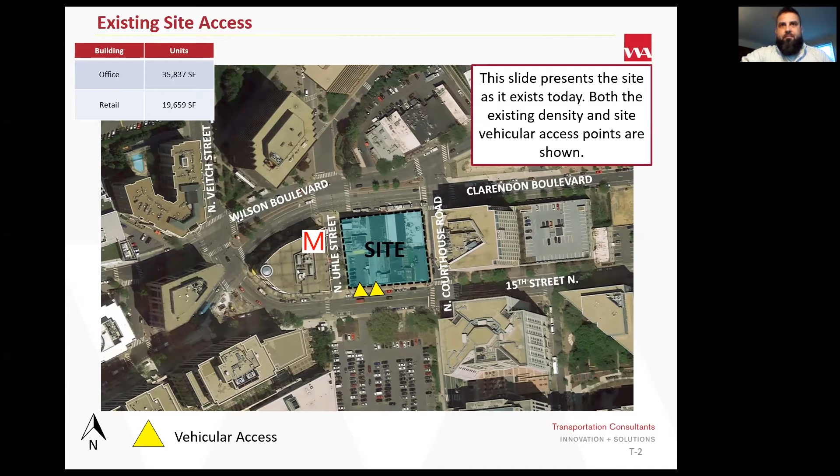The site is currently developed with 35,837 square feet of office and 19,659 square feet of retail. As proposed, the site would be redeveloped with 425 dwelling units and 17,000 square feet of retail.

The existing Uhle Street would be converted into a pedestrian promenade as envisioned in the plan. Curb extensions would be provided in the northwest quadrant, connecting the existing crosswalk to shorten the crossing distance, as well as in the northeast corner of the project at Clarendon Boulevard and Courthouse Road, and in the southeast quadrant at 15th Street and Courthouse Road.

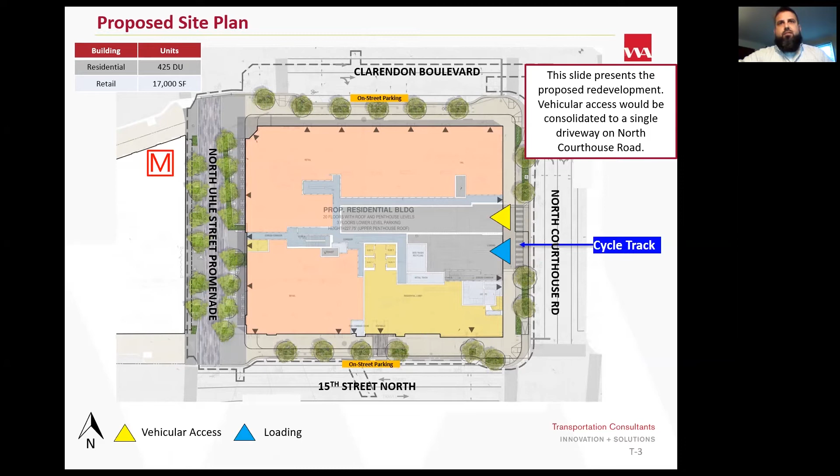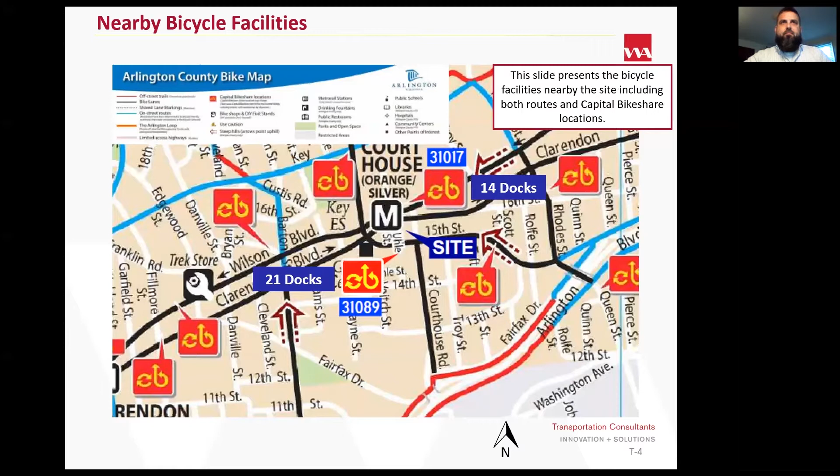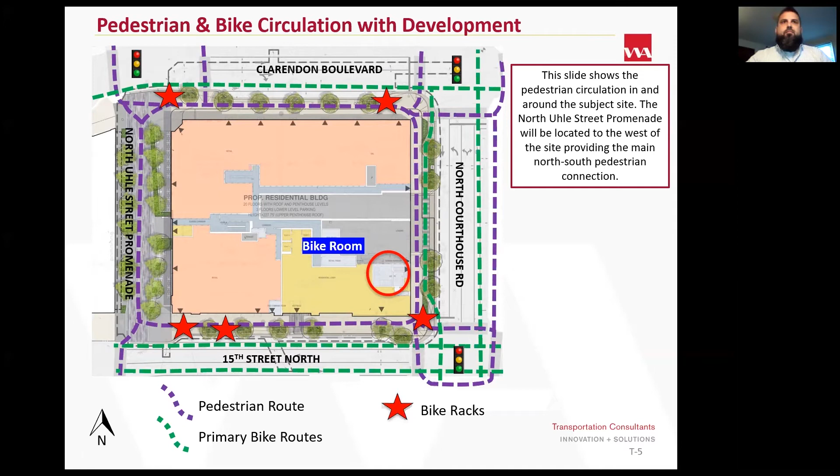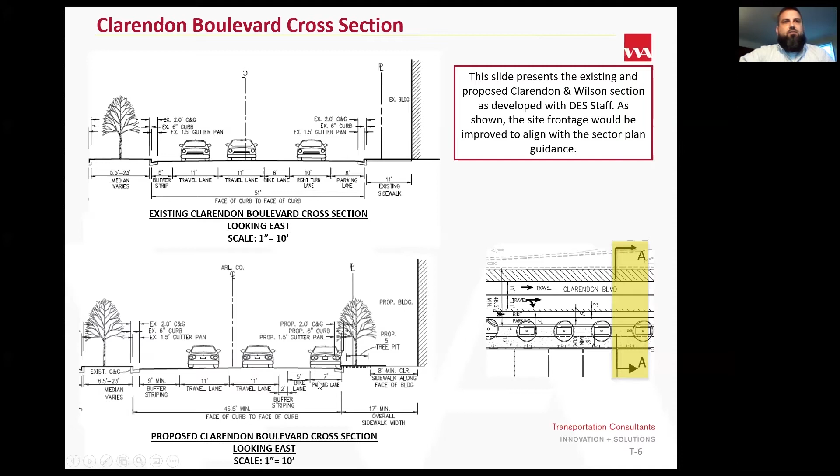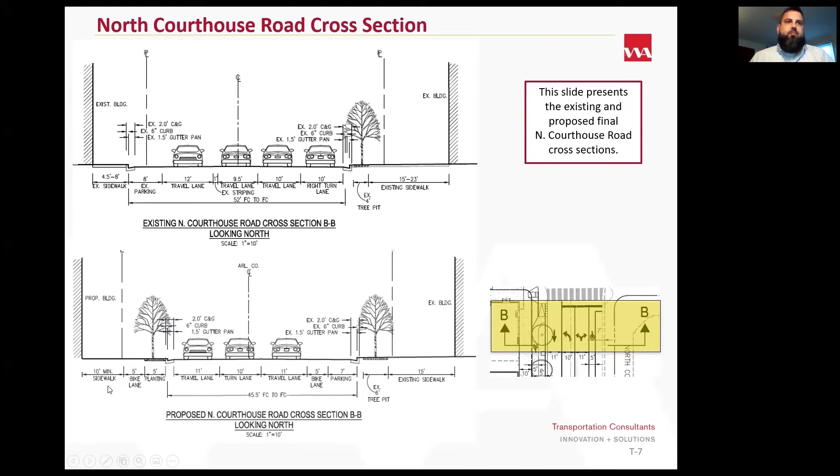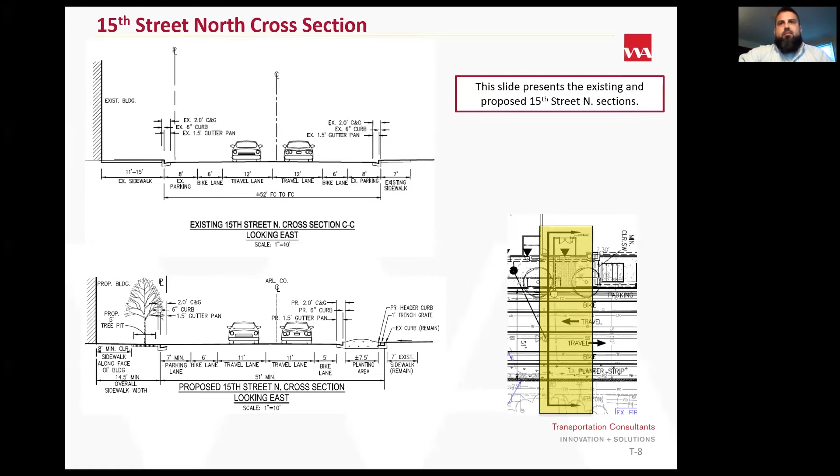This cross-section highlights the 15th Street North cross-section. Starting on the left side of the plan with the proposed building, there will be an 8-foot minimum clear sidewalk, a 5-foot tree planting strip, a parking lane, a bike lane, 1 travel lane in each direction, and a bike lane in the eastbound direction. The existing parking lane would be converted to a planting area to complement the park where the existing surface parking lot is today. Each of these sections I've outlined and summarized have been coordinated with staff and are envisioned in the plan.

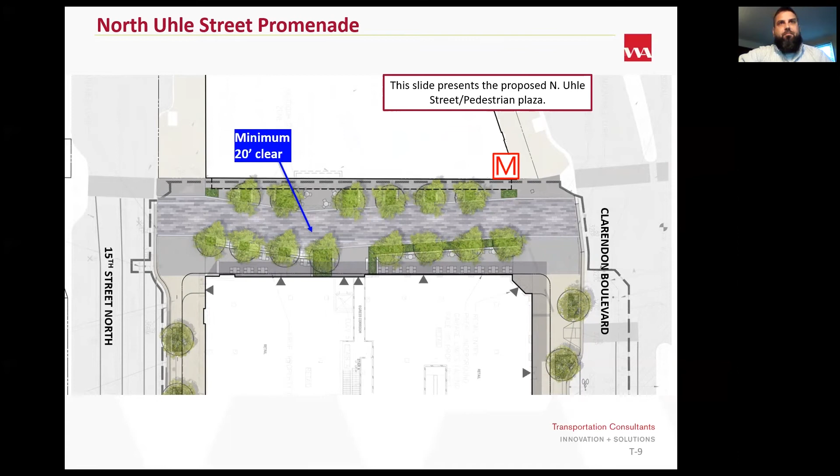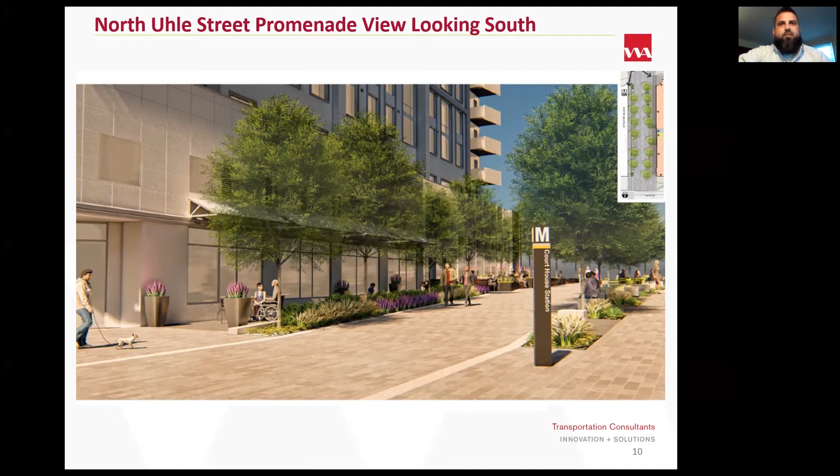This is a rendered shot if you were standing at the metro access point looking at Clarendon Boulevard, looking south towards 15th Street, with the proposed building in the background.

This slide summarizes the parking for the site, including vehicular and bicycle parking, as well as loading. The residential piece, 425 units, will be parked with 160 spaces for a 0.38 ratio. The retail will include 60 spaces for a 3.53 per thousand ratio. A minimum of 2% electric vehicle spaces with infrastructure for up to 50 spaces would be provided. A total of 426 Class 1 bicycle spaces will be included, including an at-grade bike room as well as bike rooms in the garage levels. The site will be served by 4 loading berths.

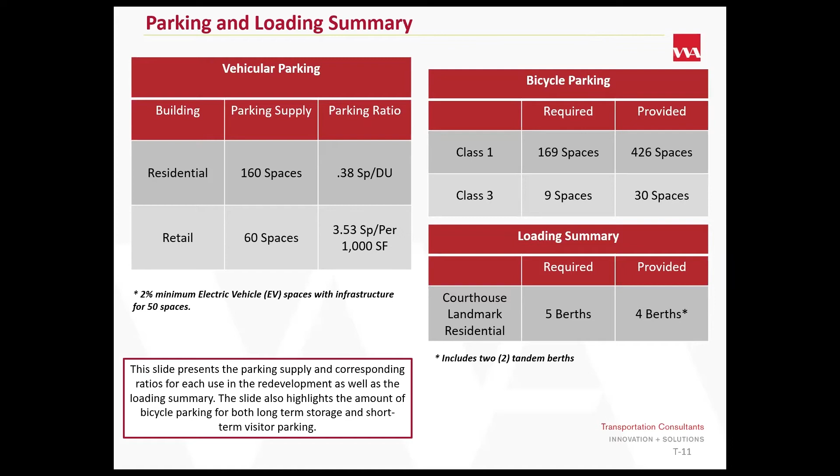This slide summarizes where those 4 loading berths are, directly south of the driveway accessing the garage. There are 2 tandem sets of bays that would allow larger vehicles to use one of the 2 bays at the same time. We are also showing an SU-30 pulling in and out of the proposed bays. A loading management plan would be provided for Arlington County approval, outlining loading and delivery procedures as well as helping manage the docks.

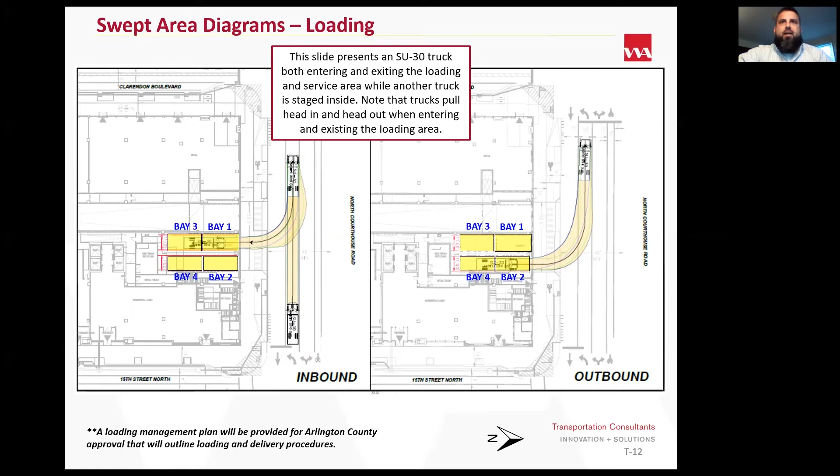Our final slide summarizes the transportation demand management plan, consistent with standard conditions for site plans, including participation and funding, facilities and improvements, car and van pool parking for residents, promotion services and policies, as well as future performance and monitoring. Thank you.

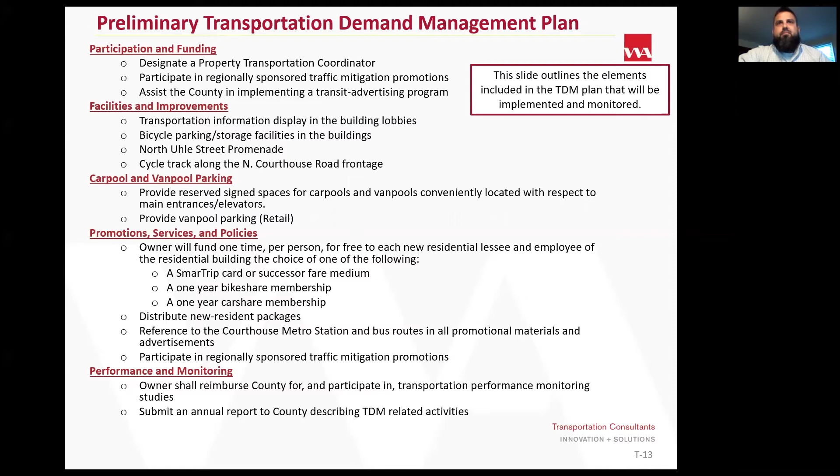Hi, I'm Jennifer Wolf with Sustainable Building Partners, and I will be presenting the sustainability portion for the 2025 15th Street North project. The project will achieve LEED Gold certification under the LEED BD&C version 4 multifamily mid-rise rating system. It will also be designed to achieve ENERGY STAR certification during operation. Energy performance is a priority, and at least 15% energy cost savings will be demonstrated. The project team continues to explore ways to increase performance, reducing on-site energy use and global greenhouse gas emissions.

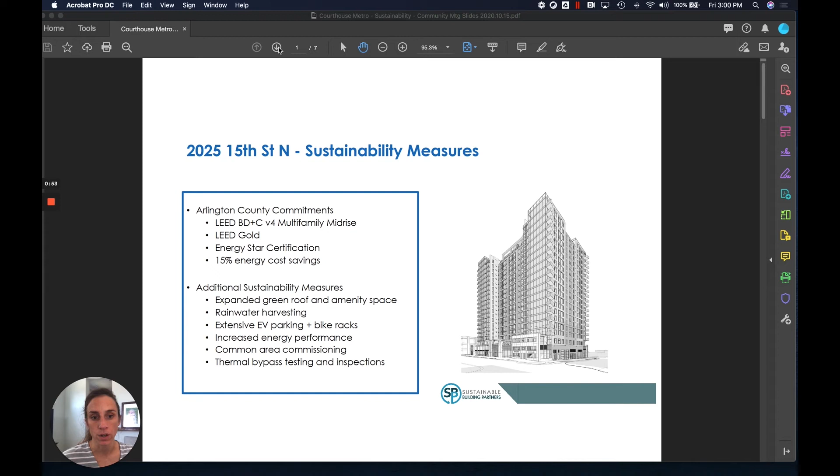Additional sustainability measures include expanded green roof and amenity space, rainwater harvesting, extensive EV parking and bike racks, and in combination with increased energy performance, common area commissioning and thermal bypass testing and inspections will occur to ensure the project is operating as intended.

This slide shows the stormwater management strategy. Low-impact development techniques, including native and adaptive plants, vegetated roof, bioretention, and rainwater harvesting, will be used. The vegetated roof and bioretention together equate to 7,300 square feet. The strategy will exceed Virginia runoff reduction requirements.

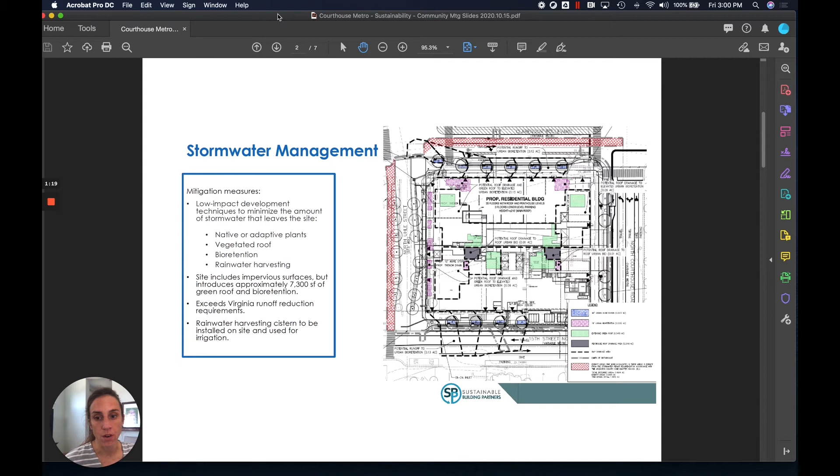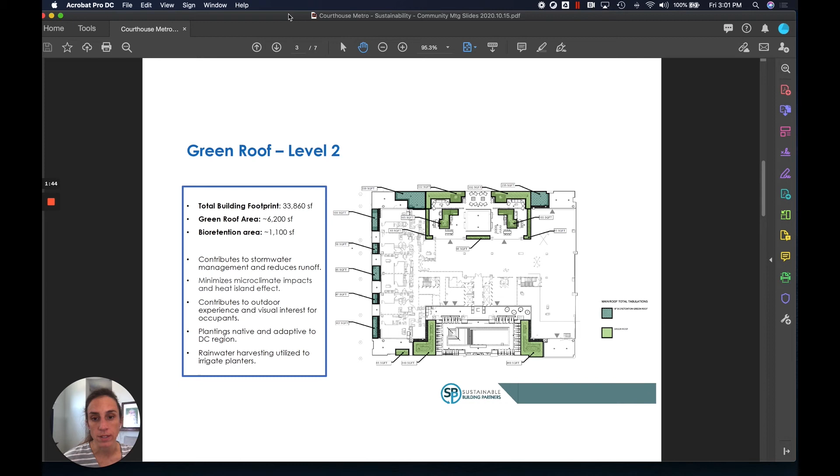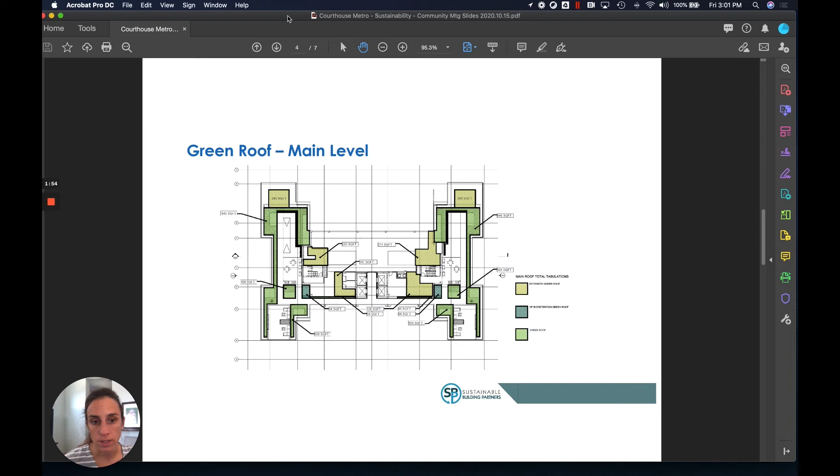The next 2 slides show the green roof locations. As mentioned, 7,300 square feet of green roof and bioretention area is provided, contributing to the stormwater management strategy. But this green roof area also reduces microclimate impacts and heat island effect, and contributes to the outdoor experience of the occupants. This image is the main roof level and shows the extensive green roof, bioretention, and green roof locations.

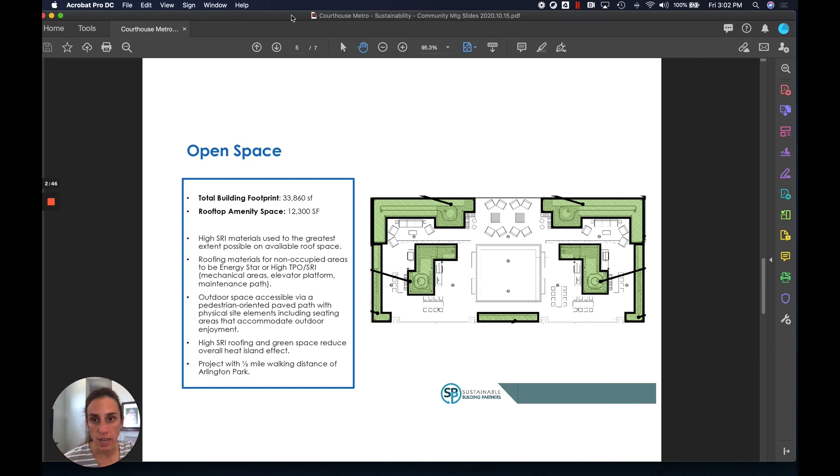Surrounding the green roof area, and as part of the roof design, is 12,300 square feet of amenity space. Physical site elements, including seating areas, will be provided throughout to accommodate occupant needs. High SRI materials for the pavers in the amenity space will be used to the greatest extent possible, but occupant experience will also be considered when making these selections. For non-occupiable areas, like the mechanical well space and stairwell roof areas, high SRI white products will be used. The project is also located within half-mile walking distance of Arlington Park, so there's plenty of open space opportunities for occupants.

The site is located within close proximity to the metro, buses, and various community resources and amenities. Currently, EV charging infrastructure is planned for 50 parking spaces to promote sustainable transportation options, which equates to 22% of the parking capacity for this site.

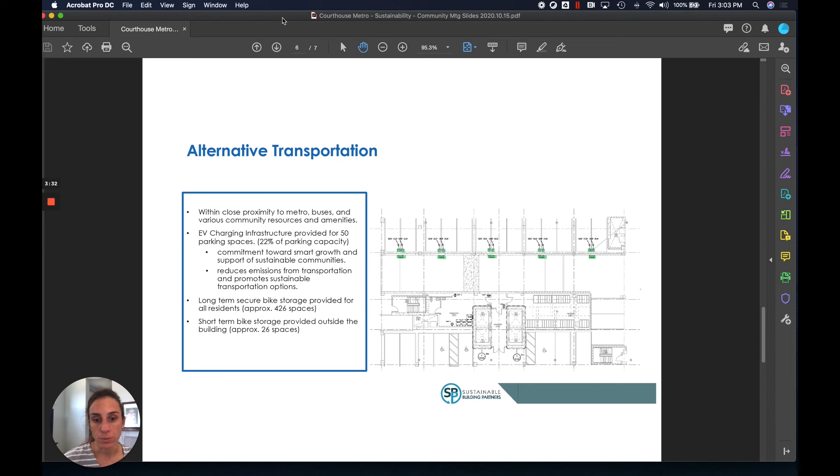Long-term bike storage and short-term bike storage is also provided. 426 spaces in the garage and level 1 are provided as long-term bike storage. Racks around the building will also be provided to store 26 bikes.

Lastly, energy performance is a priority for this project. The project is on target to achieve at least 15% energy cost savings and is striving to increase the savings as much as possible.

The high performance elements include improved U value and solar heat gain coefficient for the windows, a high performing VRF system, an LED lighting design, targets for lower lighting power density in the garage, common areas, and back of house areas, Energy Star appliances and equipment, and premium low flow plumbing fixtures to reduce hot water demand.

The energy model analysis process is iterative and will occur at multiple design milestones. At each milestone, the project team will continue to explore ways to increase performance of this building.

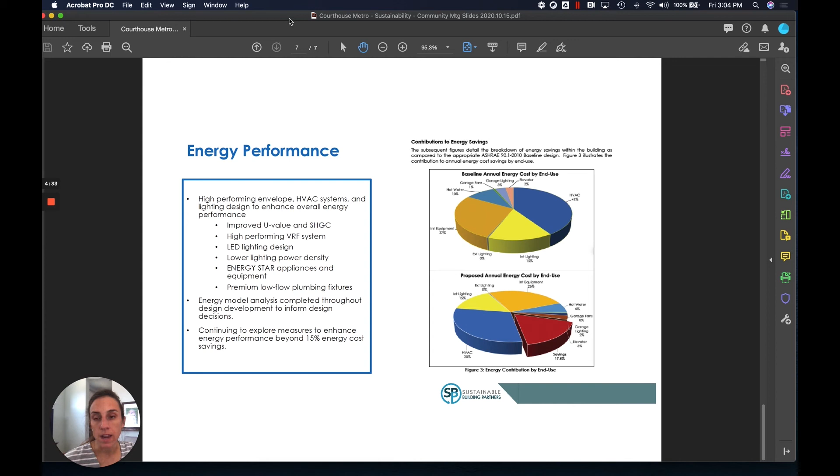That concludes the sustainability portion. Thank you, Mike and Jennifer. There was one additional point I wanted to add regarding the transportation presentation.

The sector plan calls for an underground connection to a planned garage across 15th Street. We have accommodated this future connection with knockout panels in our garage.

The community benefits package is still in discussion with county staff. However, the biggest impact to the community will be the transformative Uhle Street Promenade.

As discussed previously, the sector plan calls for Uhle Street to be a vibrant and broad pedestrian promenade walkway lined with trees, active retail uses, and distinctive lighting. Our landscape architect Land Design has put together a plan for an engaging and dynamic space within the Uhle Street Promenade. This is the first step towards the greater vision for open space set forth in the sector plan for Courthouse.

In addition to Uhle Street, we are coordinating with county staff on potential improvements to 15th Street, Courthouse Road, Wilson, and Clarendon Boulevard. Also, as previously discussed, we are implementing the sector plan's recommendation of historic preservation of the First Federal Savings and Loan and Investment buildings.

As mentioned by Jennifer with Sustainable Building Partners, we are exploring additional sustainability measures above LEED Gold. We will also be making a number of standard site plan contributions, including the base affordable housing contribution, utility fund contribution, and public art contribution, and providing funding to Arlington County Commuter Services Program as part of our transportation demand management efforts.

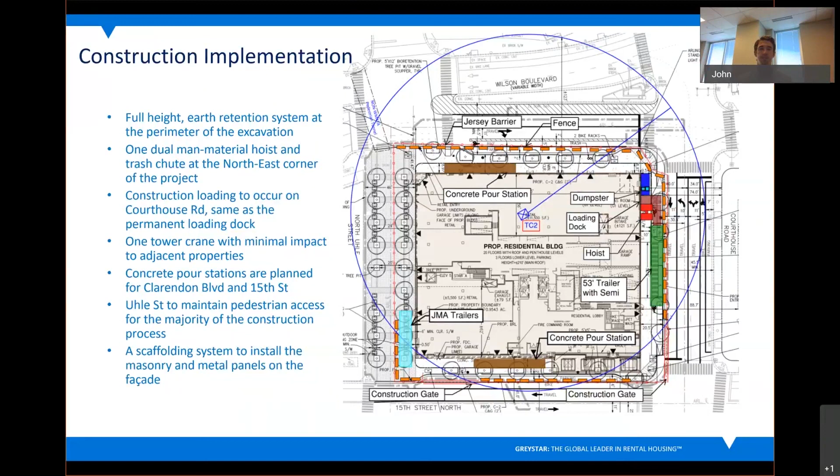The project is scheduled to begin historical preservation of the two historic facades the summer of 2021. Demolition and excavation will immediately follow. The below-grade parking garage and ground floor concrete will be complete 12 months later.

The concrete structure and the top floor will be complete December 2022, and our units will deliver Q4 of 2023.